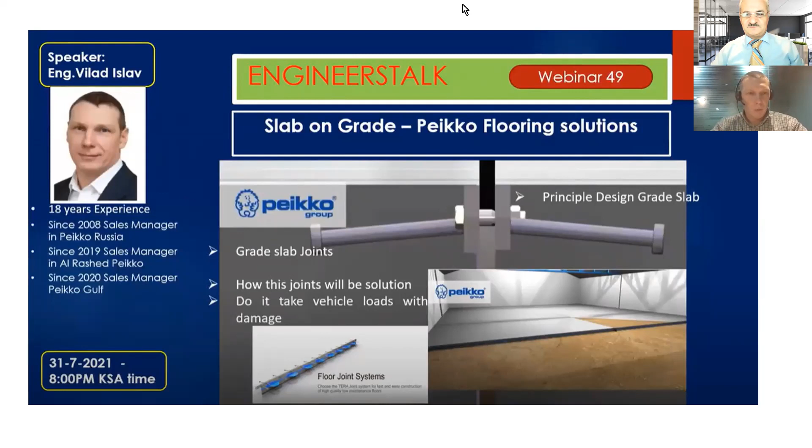Can you see my screen now? Yes. So today I want to discuss with you about free movement joints. These joints are used for industrial floors and installed between two flooring slabs. Today's discussion will be about how to protect these joints.

This is the schedule of our presentation. We will discuss general information about flooring, about problems which can happen with flooring during exploitation. I will introduce the Peikko flooring solution, which will show how to protect joints and which mistakes can happen. Also, I will show you some reference list of Peikko and Peikko projects in the Gulf region.

I will also show you Peikko TERAJOINT production. We are producing this material in UAE, in the Gulf region, which means delivery time can be very fast, within a couple of days, if this product is available in stock. I think this point should be very important also.

So this is industrial floors, and I hope all of you are already familiar with this problem, that industrial floors crash after a couple of months of exploitation - cracking can happen. This is a big problem for moving any different equipment in warehouses, like forklifts and other equipment. Of course, these flooring joints need to be repaired.

For repair of these joints, it is always costly and always takes time. It is necessary to stop all operations in warehouses, remove all goods, and start repair. Of course, all construction companies are interested in saving these joints and preventing cracking. This can also save your money, because all these charges are extra costs.

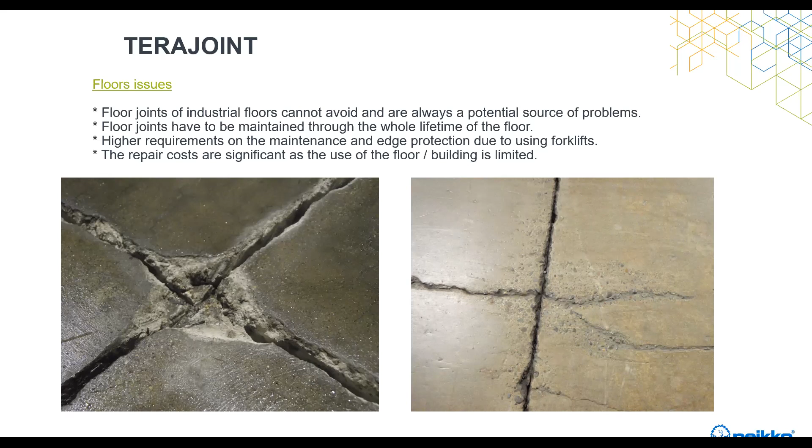Let's discuss why this cracking can happen. The main problem is that there is a very popular way - the traditional way - of installing joints. For this, many companies just install a wooden mold and cast the slab. In this case, edges of the slab are not protected at all.

You can see in the right picture, this is just a cold joint between two slabs. In this case, edges are not protected, and after a couple of months of exploitation, it has already crushed. Of course, for the construction company, it can save money, and the company can avoid extra cost, and for the client also it can seem interesting. But after a couple of months, the client will not avoid this extra cost for repair of the joint.

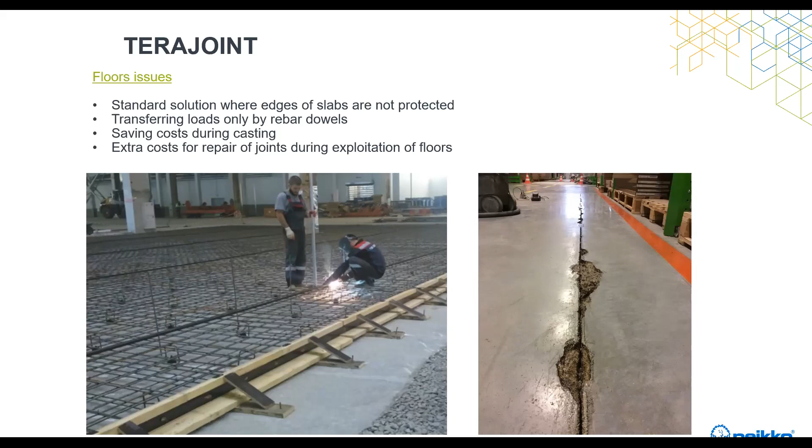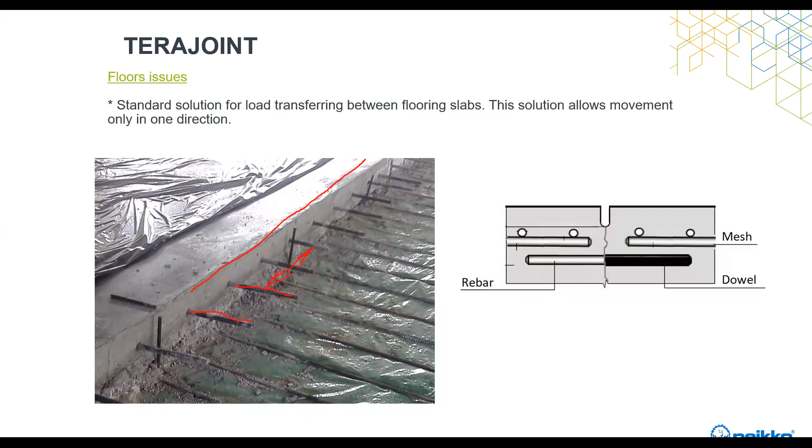This is the standard option - dowels for transferring loads. These round dowels should transfer loads, but there is also a problem - not only that, I will show you especially the location. You can see the edges of the slab, which are not protected. Also here you can see round dowels, which transfer loads from one slab to another slab. The problem is that this dowel allows the slab to move only in one direction, only horizontally, and does not allow movement in the vertical direction. This is also a problem with the standard solution.

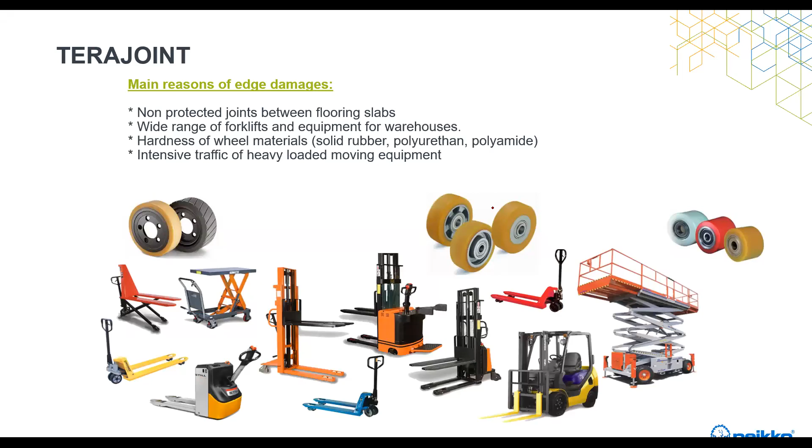Another problem is that in warehouses there are always many kinds of different equipment. All of you know the equipment: forklifts, any kind of trolleys, and all these industrial wheels are produced from very hard material, like polyurethane, polyamide, etc. Day by day, these wheels can crush these joints.

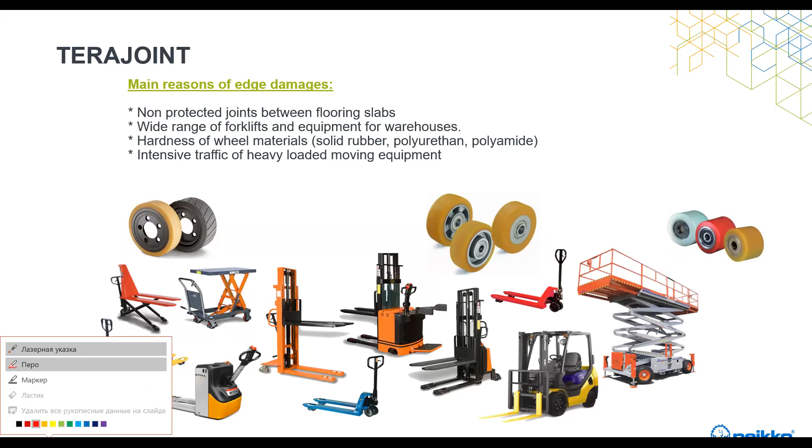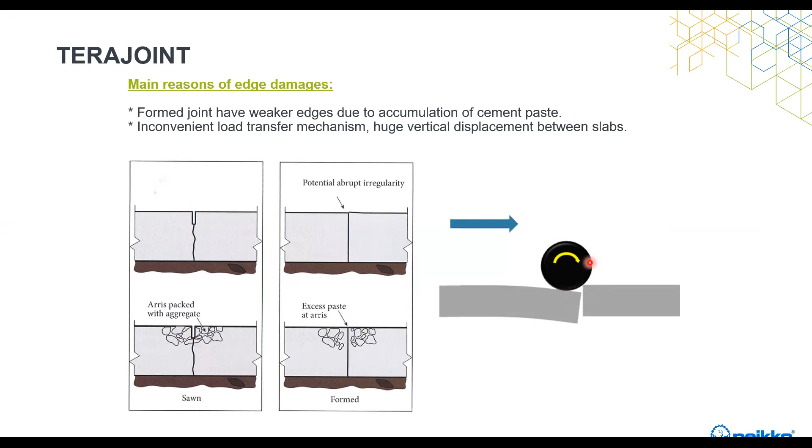Another reason for edge damage comes from casting. This edge is always weaker due to accumulation of cement paste in these areas. It means that this part of the slab is always weaker than another part of the slab. And if loads are not transferred, there will be movement in the vertical direction between two slabs. Day by day, as I said before, wheels of trolleys will crush this part of the slab.

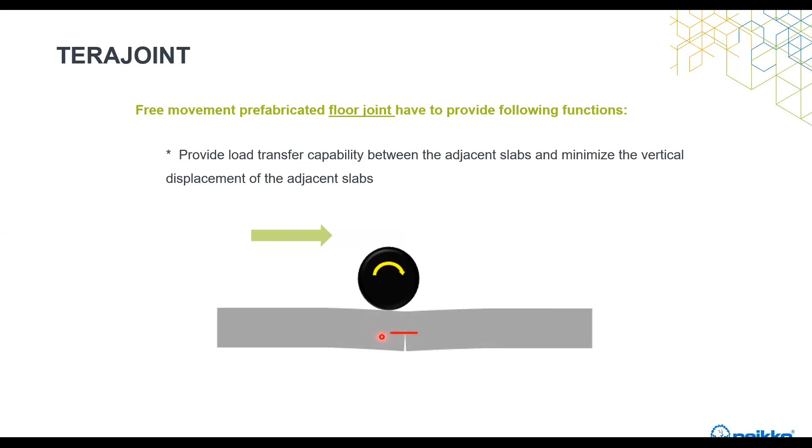To prevent this problem, to save these edges of slab and transfer loads from one slab to another, people use free movement joints. This free movement joint should provide load transfer from one slab to another slab, but this load transfer should allow moving in two horizontal directions, not only in one direction.

Another thing that prefabricated joints like TERAJOINT, like Peikko solution, should protect edges from crushing. In this picture, you can see that edges of slab is protected by a steel plate, which is 10 by 40 mm. I will explain a little bit later. Transferring of loads from one slab to another slab happens through this dowel, steel dowel, and this is a round dowel. Here is a round dowel, which is transferring loads from one slab to another slab. And even if joint opening will be 20 mm, this steel part will protect edges from crushing.

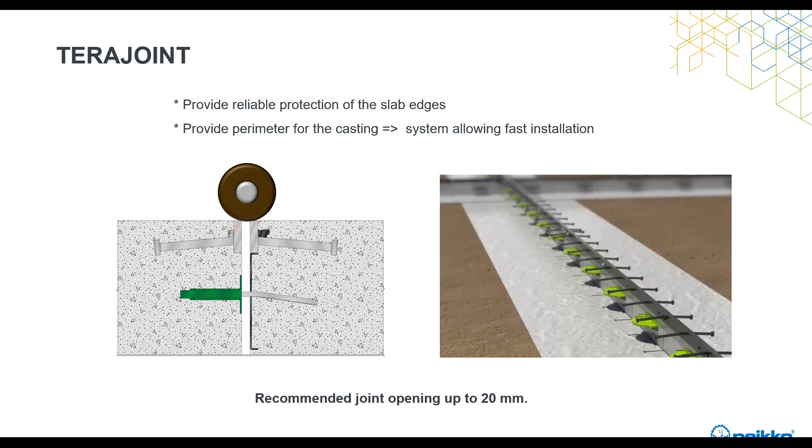I want to show you a video.

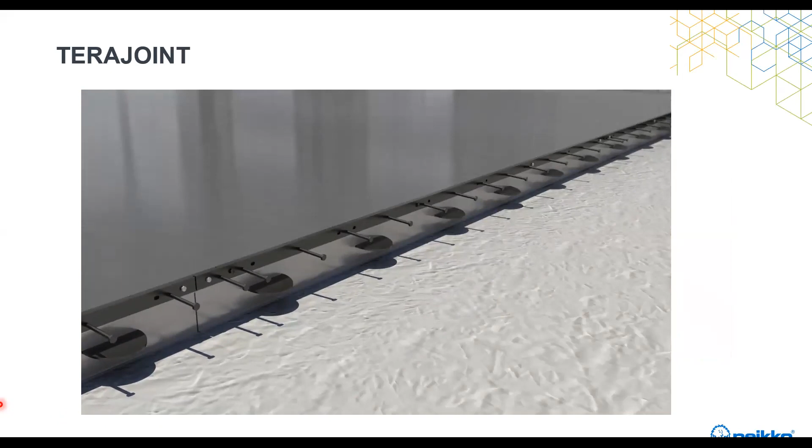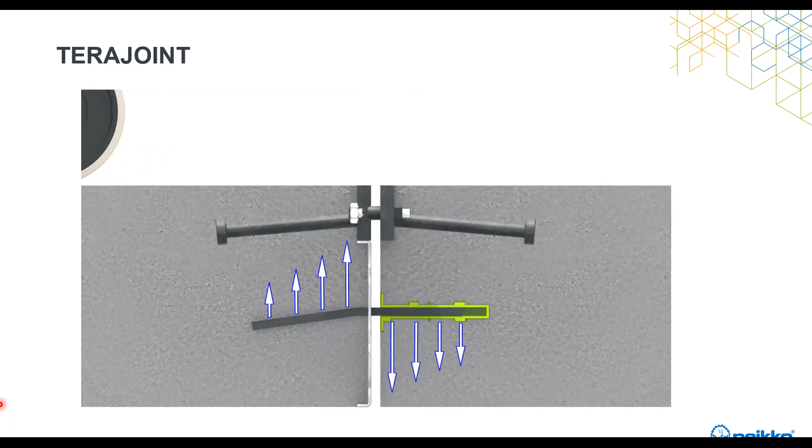This is a small video showing how this TERAJOINT works. This is TERAJOINT which we are producing. Can you hear me? Yes, Mr. Vlad. This is the TERAJOINT Peikko solution which we are producing here and which I am introducing to you.

This is two steel flat bars which are connected with each other by plastic bolts, and during opening of this joint, this plastic bolt will be crushed, and these steel plates are secured inside the slab by this anchor, you can see, and load transfers through this steel plate through dowels. On one side of this dowel, a plastic sleeve is installed to prevent adhesion between this steel part and the concrete slab, and also to allow moving in two horizontal directions.

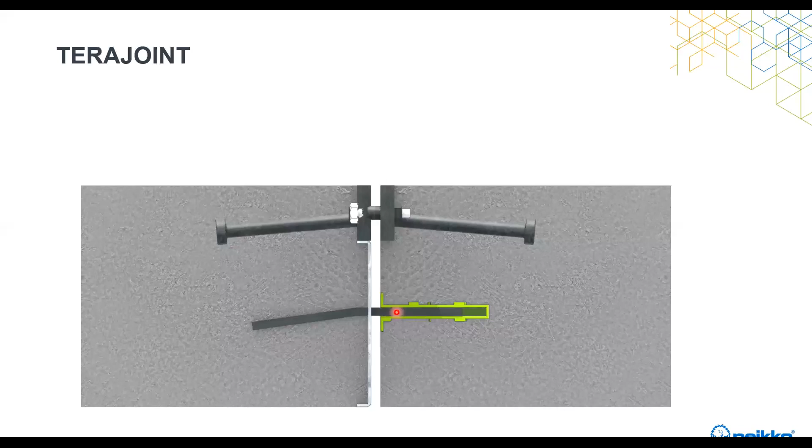Here in this picture, you can see dowels. This is dowels, sleeve, two flat bars, and the anchors which secure these flat bars inside the concrete slab. These flat bars protect these edges from crushing.

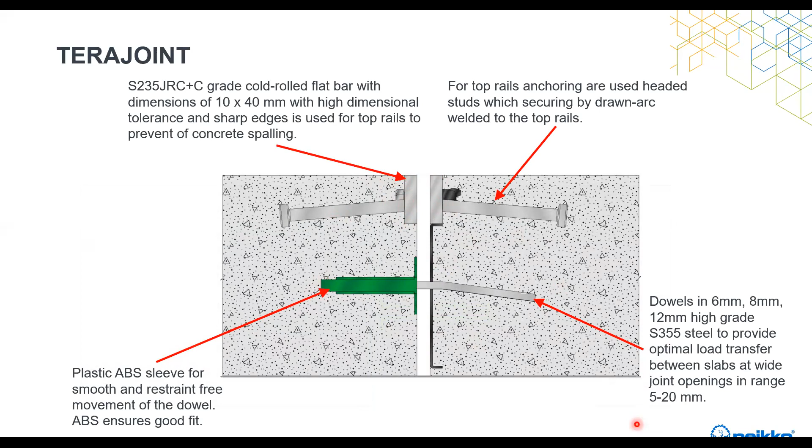A little bit about theory. Why is this joint opening? Engineers very often ask why this joint opens. This is due to shrinkage of the slab. As you know, after casting, the slab will change size, and normally it should be approximately 1 mm per linear meter of slab. It means that if the slab is approximately 30 by 30 meters, the shrinkage opening of this slab will be approximately 30 mm.

But it can be more, it can be less. It depends on the size of slab, it depends on the thickness of slab, it depends on the concrete grade. We are speaking about opening of TERAJOINTs up to 20 mm.

In this picture, you can see that TERAJOINT allows opening in two horizontal directions: after shrinkage in this horizontal direction, and due to some forces inside concrete in this horizontal direction along the joint.

Regarding maximum size slab, if the slab will be jointless, it can be 30 by 30 meters. This is maximum size. If it will be bigger, like 50 by 50, it should already be with saw-cut joints.

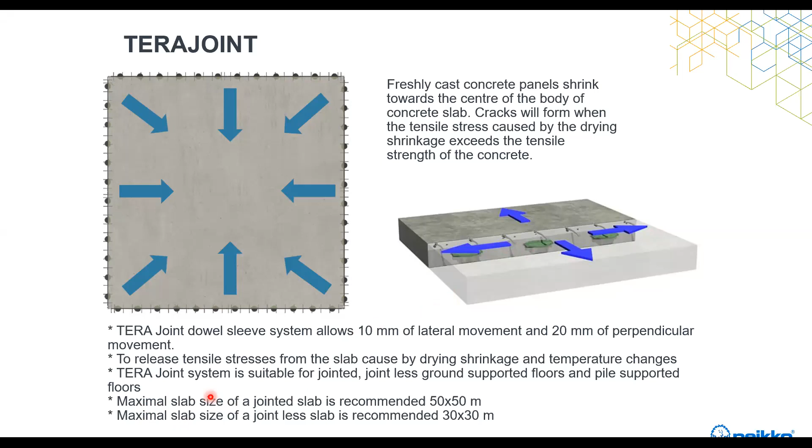Sizes which we are producing go from 90 mm height of joint to 245 mm. It means that normally it should be used for slab thickness from 100 mm to 300 mm.

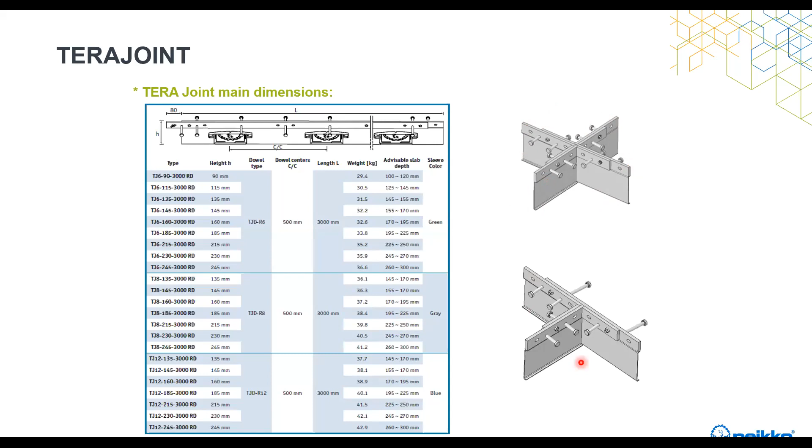For connection of joints, we can propose X junctions and also T junctions.

A few words regarding material and areas where TERAJOINTs can be used. TERAJOINT can be produced normally from black steel. TERAJOINT top rails and dowels are black steel.

For some cases, if TERAJOINT will be used outside of warehouses, it can be hot dip galvanized. Of course, hot dip galvanizing can protect and joints can work outside, but it cannot give full protection from water. If you need more protection, we can provide TERAJOINTs with stainless steel top rails, only the top rails.

If you need more protection, for example in areas where there will be some acid or something like that, we can provide TERAJOINT with top rails produced from 316 stainless steel grade, and also all parts inside like divider plate and plate dowels will also be produced from stainless steel. This depends on the client's needs.

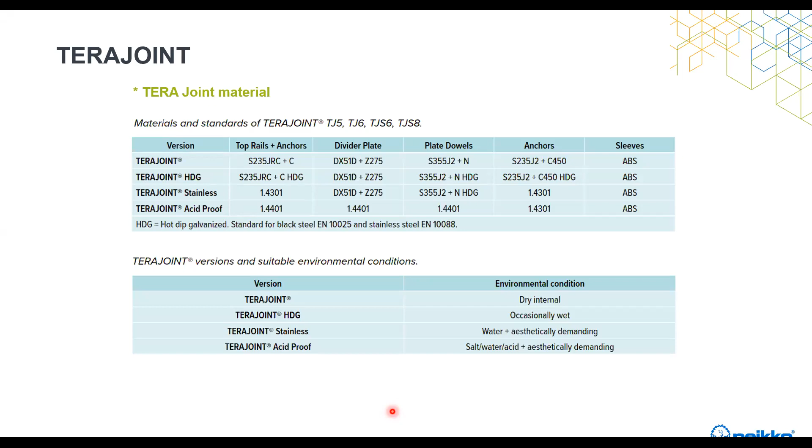Also, we can produce a TERAJOINT which we call pre-opened. It means that between these two parts, two flat bars, foam will be pre-installed. Foam can be different thicknesses, 5 mm, 10 mm, 15 mm, depending on needs. We can calculate exactly which thickness of foam the client needs.

In many cases, when casting during winter time, there is some risk that after casting, the slab during high temperatures in summertime can start to increase in size, can change size and become bigger. In this case, there should be foam between these two slabs.

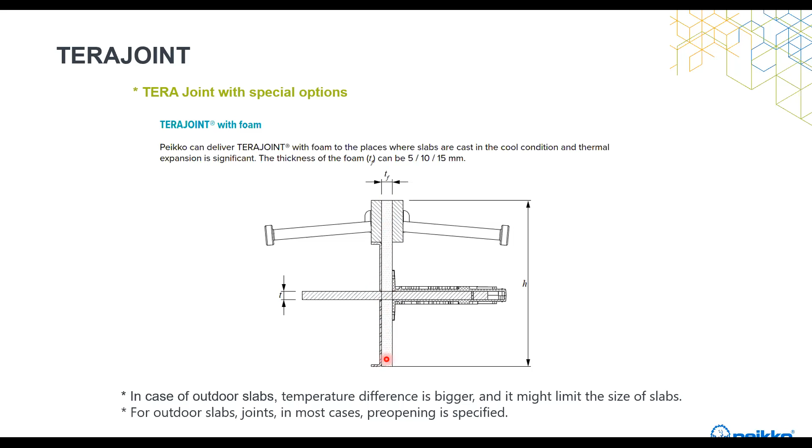For installing TERAJOINTs, we recommend using a special fixing device instead of rebar pins. This fixing device can secure TERAJOINT in the correct position, and it allows very fast releasing of the installing device after casting. It is not needed to use special rebar pins.

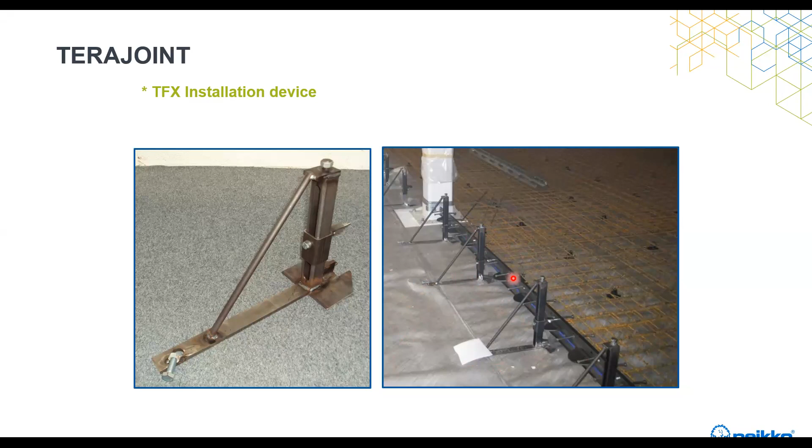Another important question: what will be the visible parts of TERAJOINT after casting? At this picture, you can see the visible parts - only two steel plates, each 10 mm wide, so 10 mm plus 10 mm, and between these two steel plates there will be an opening. We normally recommend rubber sealing between these two parts.

At this picture, you can see the connection of two TERAJOINT elements and how they should be connected with each other. As I said before, these two parts are connected by plastic bolts. Each element has 3 meters length, and for connecting two elements we provide special plastic bolts and wing nuts. At site, workers can install TERAJOINT and connect it with each other using these plastic bolts and wing nuts.

Also, for securing, people can use rebars. This is just a pin, and this pin secures TERAJOINT in proper position. This is also a visible part from another project.

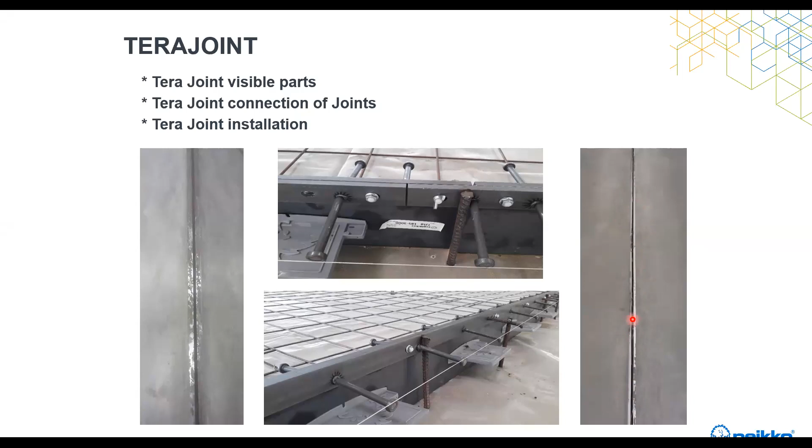Engineers often ask how it will look during exploitation, because it's black steel. But I can say that during exploitation there will be movement of different kinds of equipment like trolleys and forklifts, and these steel parts will always be polished. They will always look like in this picture - polished, with no rusting.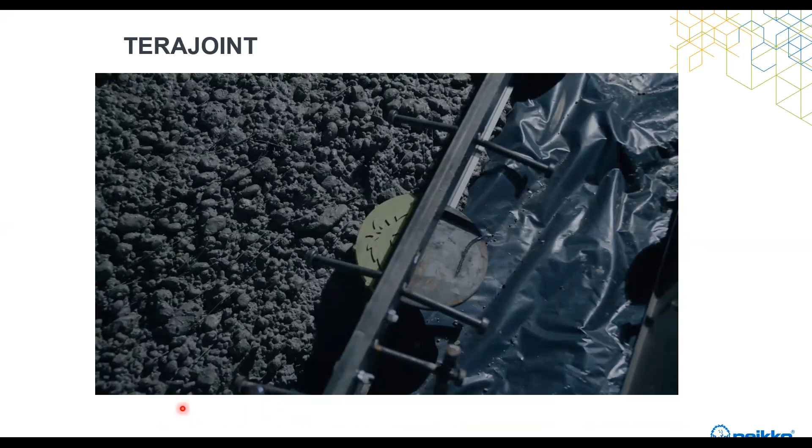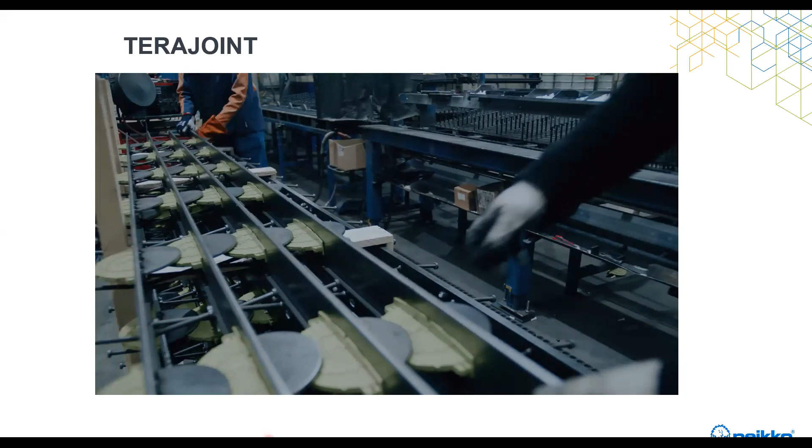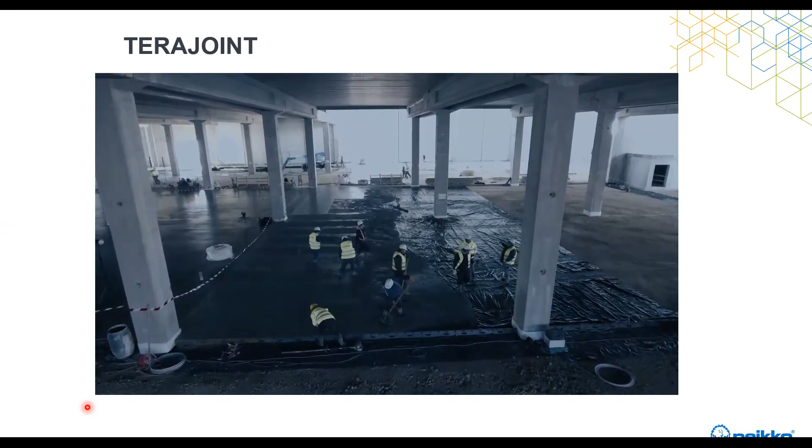I will show you one video with some parts from our production and from casting.

Regarding calculations, in this video there were some pictures from our office with engineers who can calculate Tera joints as per client's needs. Here is a link - this is Peikko software, which we call Peikko Designer. One part of this Peikko Designer is especially designed for flooring joints, for calculations of flooring joints.

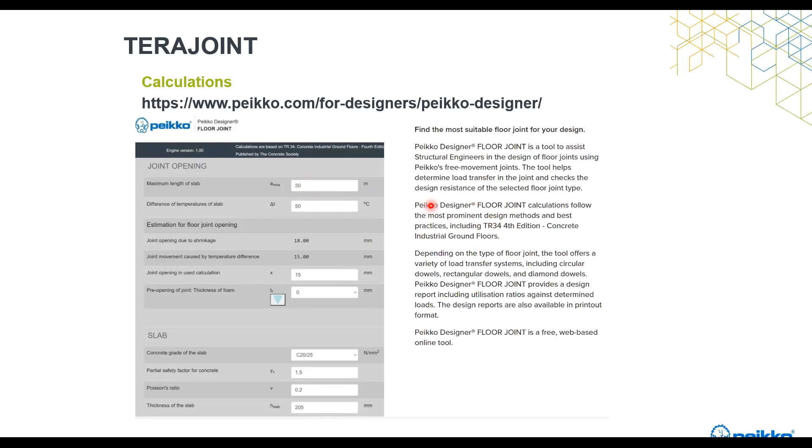All of you can install this software - just download it from our web page. I can share this presentation with you along with this link. Calculations are done as per TR34 rules, and it is necessary to input all data: size of slab, loads, and as a result you get which thickness of dowels you need to transfer loads.

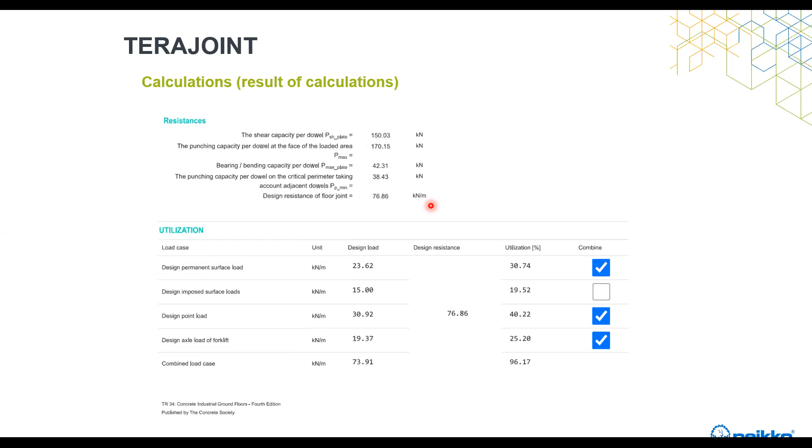Also, we can show you how to calculate, or we can collect all the data. You can just share drawings with us, and our engineers can calculate and give you a final offer with the needed thickness of dowels which will transfer the loads. Top rails, the top part of Tera joint, will always be the same - 10 by 40 mm.

Also, this is our new product, which we call Peikko Wawed Joint. As you can see, this is the same as sinus joint or cosinus joint - a wavered joint. Principally it's approximately the same as Tera joint - there are dowels for transferring loads and top rails, but these top rails are waved.

For which purpose are these wavered joints used? These wavered joints are especially designed for splitting loads. When forklifts or trolleys, especially heavy forklifts, cross joints between two slabs, thanks to these wavered joints there is a splitting of loads and not strong hitting at the edges of the slab. This means these wavered joints protect edges more efficiently.

For some cases, some clients - I know especially in Saudi Arabia - are very interested in this joint, and I'm sure this product can also be interesting. We are discussing Tera joint today, but this is Wawed Joint. I have seen many times a combination of both solutions at sites and projects: companies use Wawed Joint in heavy traffic areas, but Tera joint in other areas in the warehouses. This is just a solution which can also be used.

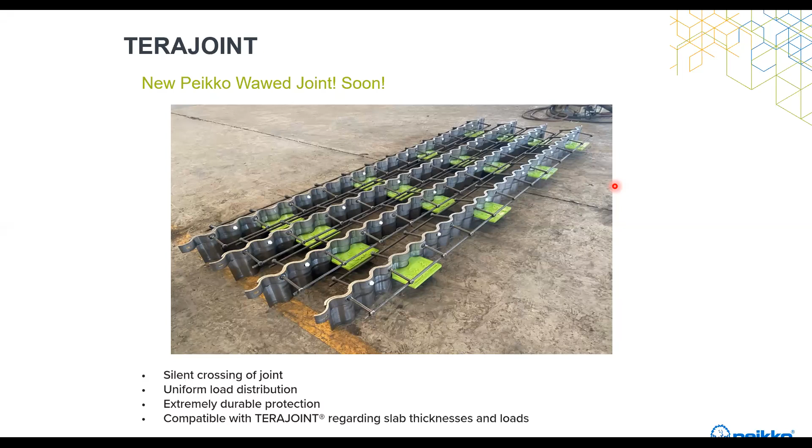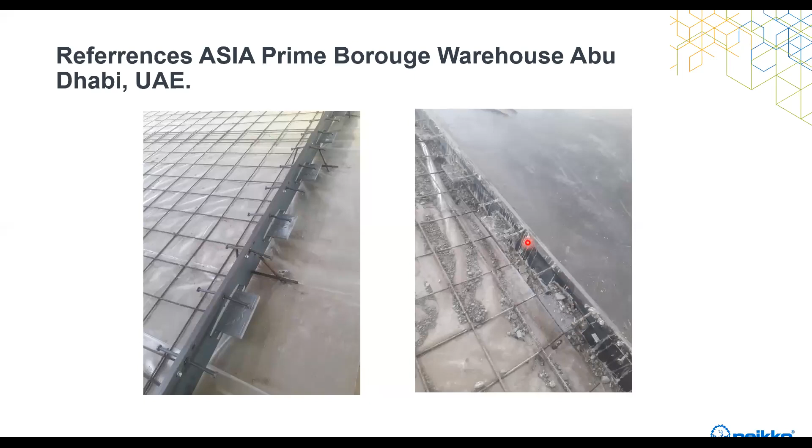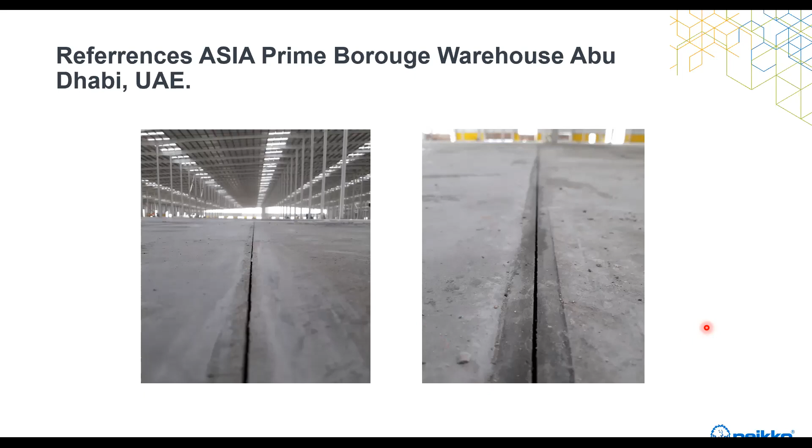This is the joint after opening, a couple of days after casting, and this joint will continue to open within a couple of weeks. This is a normal process which goes on inside concrete. After a couple of days it will open maybe 2 or 3 mm, but after maybe 2 or 3 weeks it will open only 8 or 10 mm. It's very important to avoid sealing with rubber immediately after casting, because this joint will continue to open. I will show you later some mistakes during casting.

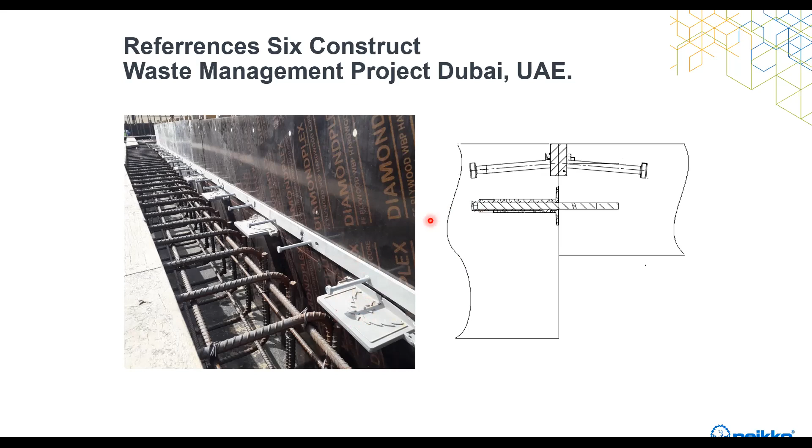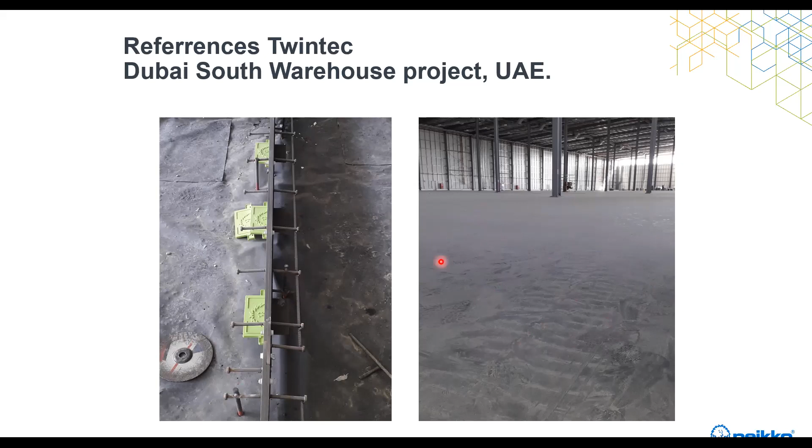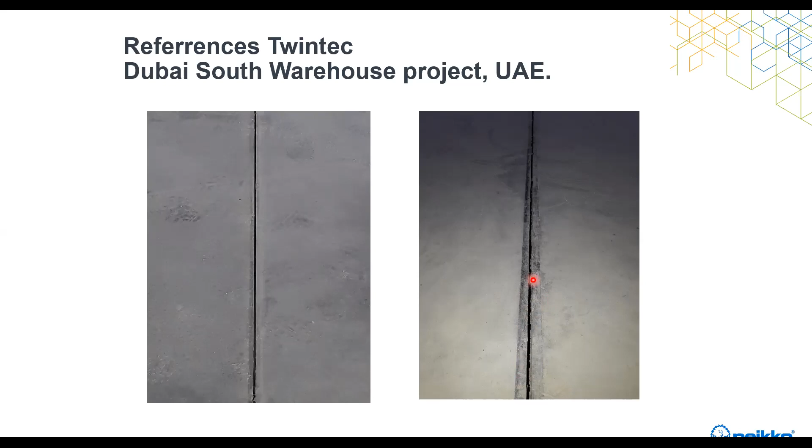This is also a visible part of Tera joint. I put many pictures with these visible parts because very often clients ask how it will look after casting, and it will look like this. I will say this is practically invisible, only some parts - 10 mm plus 10 mm plus opening, which can be an average size of opening approximately 8 to 10 mm.

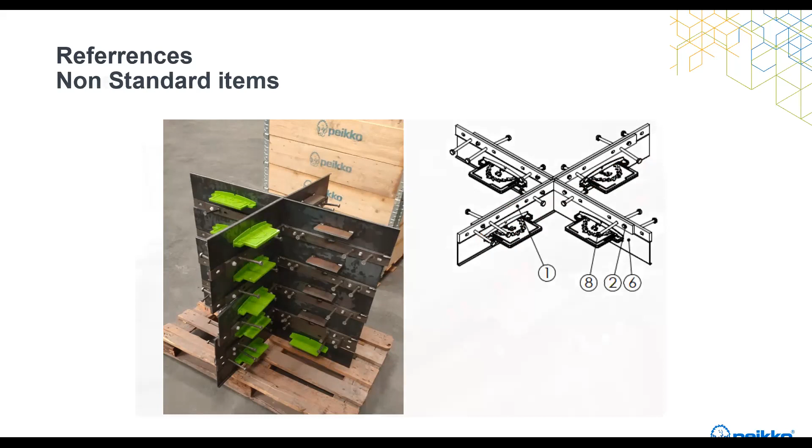Now I want to show you problems which can happen with Tera joints due to some mistakes. I think it's very important to discuss this now, that these mistakes are possible. And what is the problem?

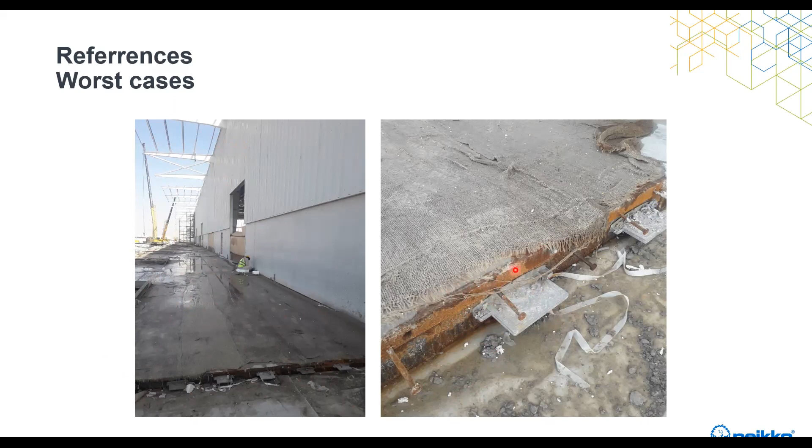Of course, it is necessary to brush and protect with paint, because during exploitation a roof will be installed here and this area will be protected from water. But during casting, during this mounting period, it is necessary to protect Tera joints, and of course it's necessary to use something like galvanized joints.

It is not needed to install a pin very close to the corner. There should be no problem for opening, because especially to prevent any problem, we supply our Tera joints with plastic balls. There should be no big problem for opening.

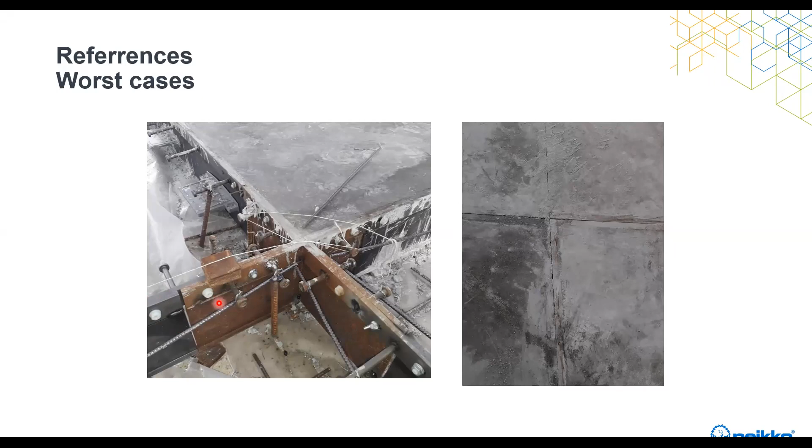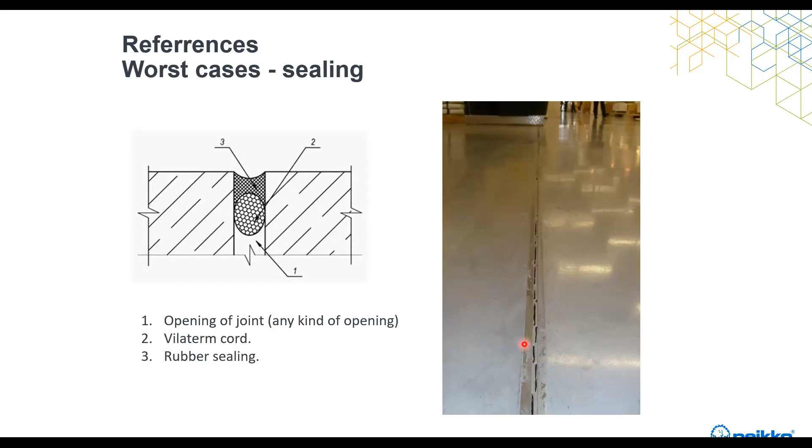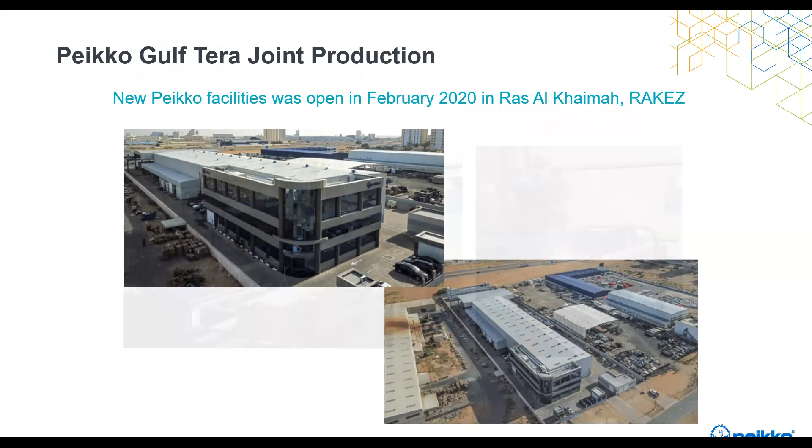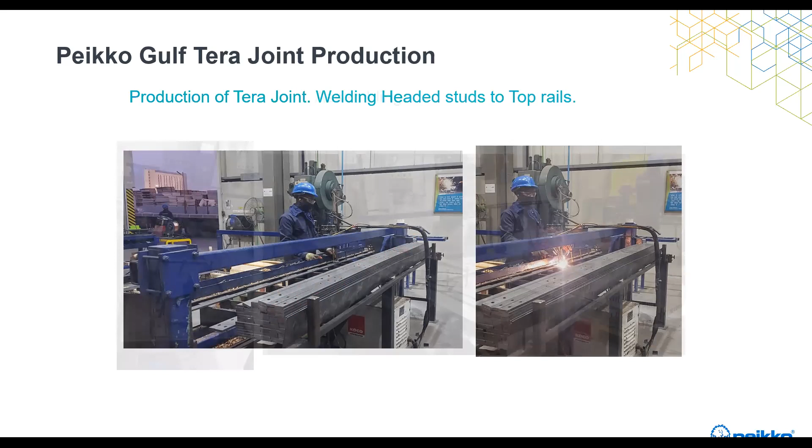This is the production equipment for Tera joints. This is top rails, already prefabricated top rails, as mentioned in my presentation. This is cold rolled steel, and this is anchors. We have a special gun machine for welding these anchors, and this is assembling of Tera joints, assembling tables, and also you can see non-standard items which we are producing for one of our clients.

And we installed these special rebars because the thickness of the slab is higher than 250 mm.

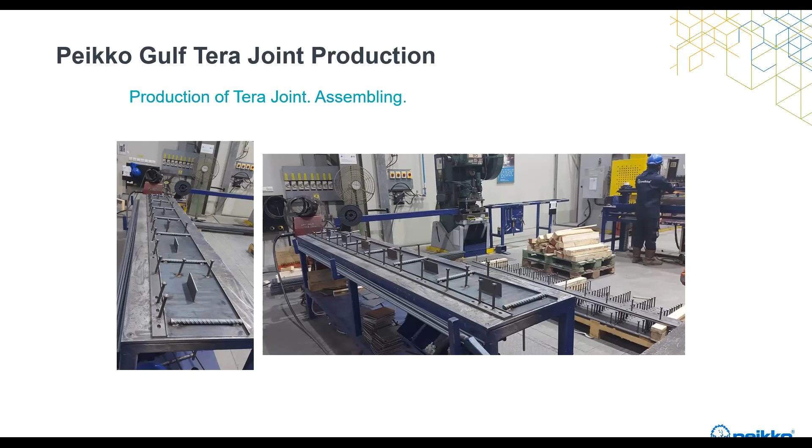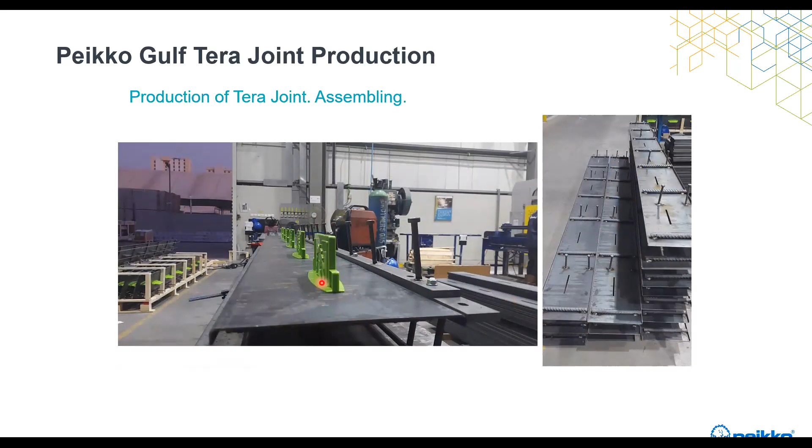This is also assembling. This green color is dowels, and it can be green colors and can be gray colors. For 6 mm dowels we're using green color dowel sleeves, and for 8 mm dowels we're using gray color sleeves. This is just to recognize what is the size, what is the thickness of the dowel.

This is packaging. Normally we are loading 30 pieces of Tera joints per pallet, and this is the storage area, and this is approximately for one truck, and we can load approximately 1 kilometer of Tera joints per truck. This quantity, I would say, is the most popular volume which our clients need for some not very big warehouses. Approximately 1 kilometer of Tera joints per truck.

So, that's it. And I would ask you, if you have any questions, please ask me. I can repeat whatever you want. I can explain more, and I can add, and I can show some more pictures.

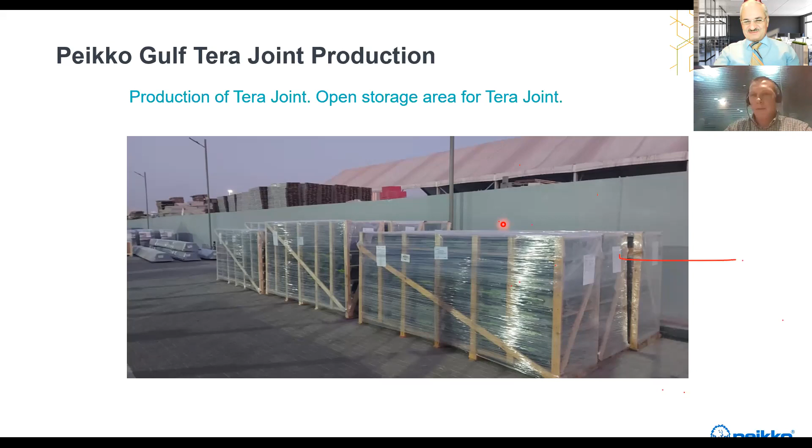Thank you very much. Thank you. Thank you. Have a nice day. Thank you for your time. Thank you. Bye-bye. Bye-bye.